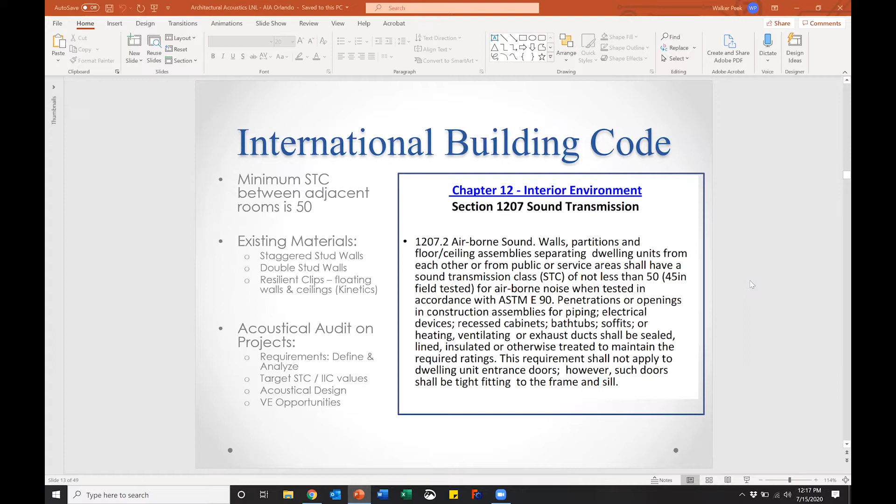Okay, but that's only multifamily. Who else cares? How do you apply that to office buildings or movie theaters? Well, here is our book that we published about 6 months ago, after 6-7 years in the field, working with architects, working with contractors, understanding issues that you guys commonly run into.

What does an STC rating give you? An STC 50, that's not a soundproof wall. That's still better than what we see in the field most of the time, but you can still hear a loud TV. At a 55, loud music's audible. At a 60, loud music is faintly audible. And at 65 plus, that's what we design our movie theaters or world-class studios to. That's what you're looking for there.

And at that point, no longer do we use STC. At that point, we're looking at 100 hertz transmission. What's the low frequency transmission? So how do you guys apply that? Here is kind of a cheat sheet from our handbook as well.

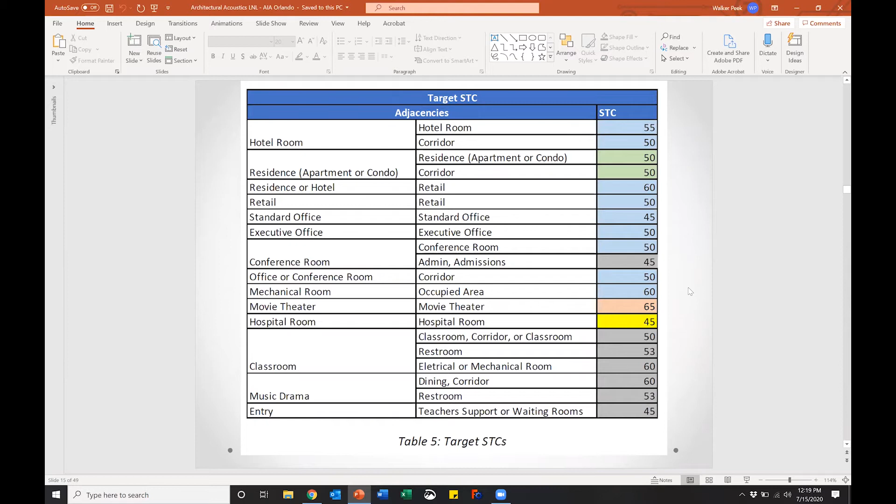So what we've worked to do is give architects, instead of going out and looking at 6 or 7 standards and not knowing what you should be hitting, we've consolidated all of those into a single chart so you can say, hey, based on these adjacencies, here's what I should be performing.

Okay, and here's the question and answer. So everybody, please get ready for the group chat. I want to try to get some participation here. We are going to use the left-hand side here. Once you know what your target STC is, the question for architects becomes, what should my target be and how do I achieve it in a cost-effective way?

So the first thing we're going to look at is our baseline wall. That's our V497 or U465, and very similar to the 419 as well. There's minor fire testing differences based on the drywall, but all of this is type X 5/8" drywall, okay? So what we really care about for STCs is the stud spacing and gauge, as well as the mass. So it's all about decoupling and mass.

This is an STC 44, 3 5/8", 25 gauge, 16 on center, with batt in the cavity and 5/8" type X each side. If we move from a 25 gauge to a 20 gauge, what do we think that this number in the blue is?

48. Thank you, David. Meltem and Christine and Daryl, try to give me a guess on the next one. I want to make sure. Oh, better. Thank you, Beth. Well, that's very interesting, and that's very common. Oops, well, I can't quite get full screen here, so I'll just move this.

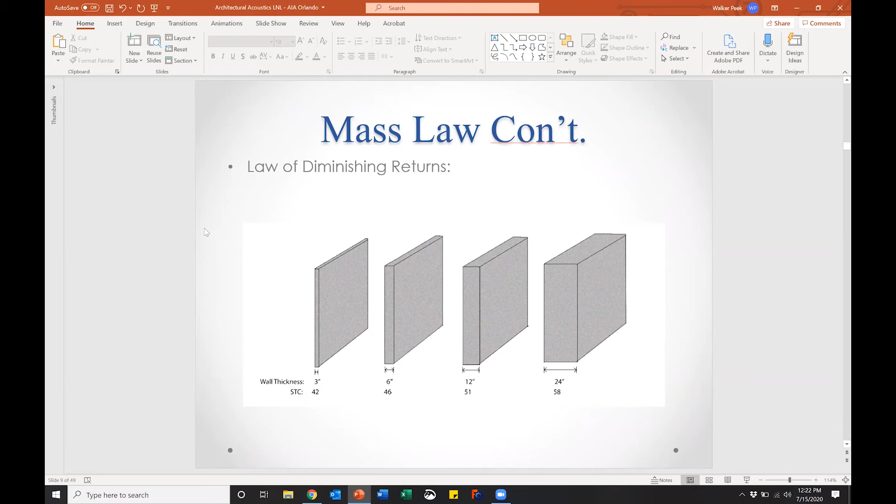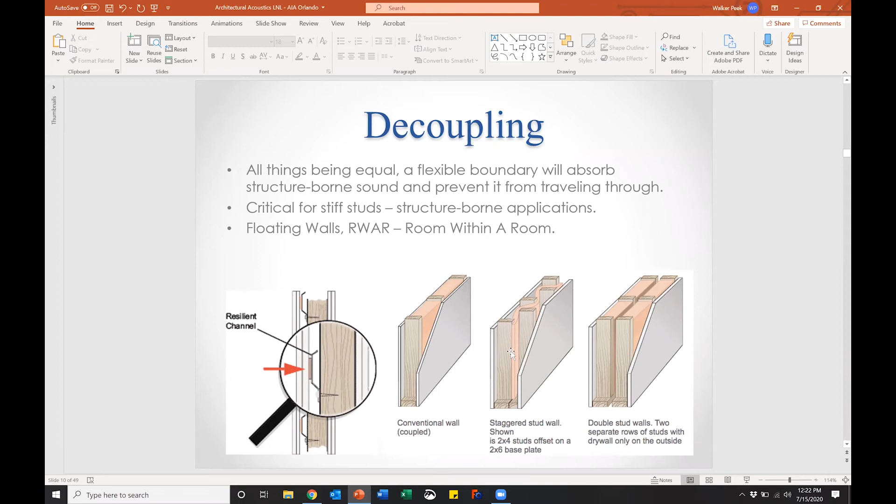But what we're looking at is if you have studs that are closer together or stiffer, well, now you've got this bridge across the cavity, and you're not actually adding more mass to the entire structure. You're only adding more mass right here.

Excuse me, did I skip one? Oh, okay, well, that's the problem.

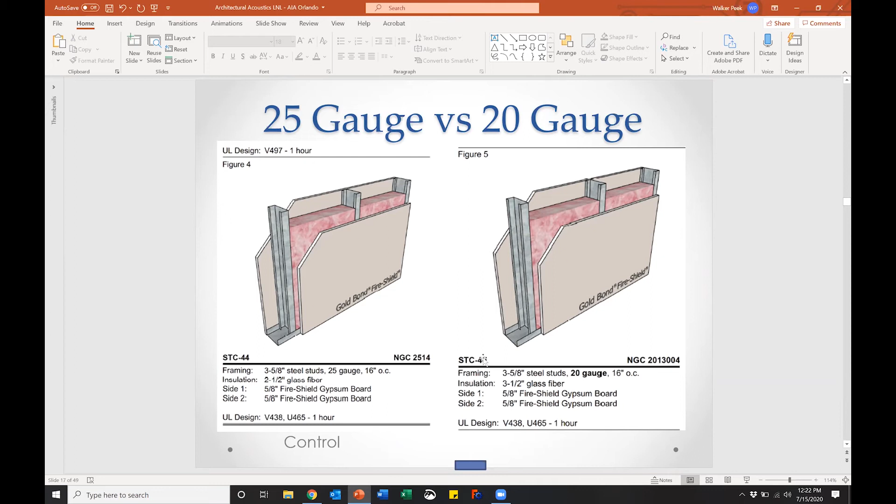I skipped this one. But you are adding more mass just where the studs are, but you're not adding more mass everywhere. So in that case, you're actually losing 4 points when you go from 25 gauge to 20 gauge.

Okay, now let me ask this one. We've got, you already know this assembly, it's the STC 44. Okay, we're gonna leave that as is. This time you're gonna take out batts in the cavity. Okay, so what do we think that the STC is this time? 38, 44. Okay, so somebody said it doesn't change. 2 people said 38, okay? And 1 says lower, thank you. In that case, you lose 4 points.

Something we see a lot is, so 1 person thought it didn't change. 2 people think it moved down 6 points. You only gain about 3 to 4 points for batt. We see it called soundproof batt a lot. It's something I try to get out of the architect's nomenclature. It's not really soundproof batt, it's R rated.

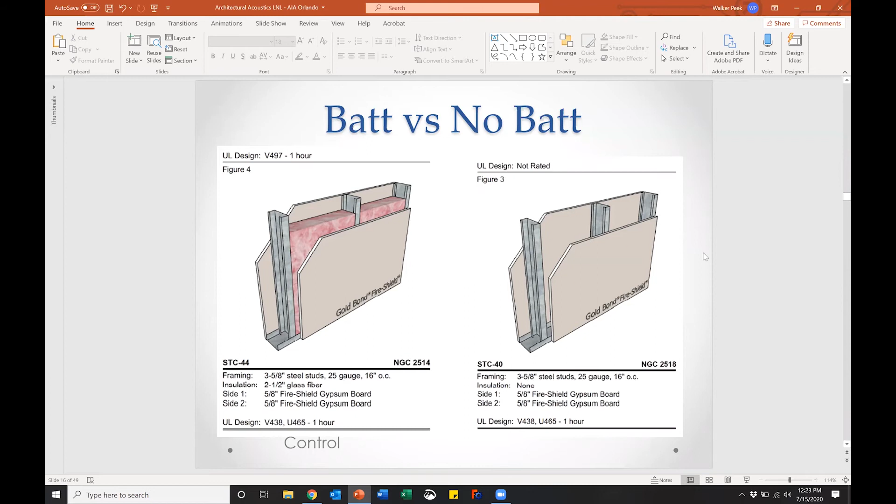That's a thermal rating, but it does help dampen those 2 sheets, and it stops the sound that goes through the drywall into that cavity from resonating in the cavity. So you do get some benefit from batt, but it's not nearly as significant as a lot of people think that it is. Okay, so next one, 44 for our standard, our kind of control variable here.

What do we think it is if you add RC on 25 gauge at 16 on center? 40. Greater, says Beth. And in this case, that's the best way to start with it. Is it better or worse? It's going to be at least better because you're only decoupling. You're not adding or subtracting mass.

So your mass isn't changing at all across the entire system, but you are getting that rigid 5/8 inch Type X slightly off, if installed correctly. But you're getting it off that semi-rigid 25 gauge. 25 gauge does have some bend to it, some give. It's not like 20, which is much more rigid. But you're getting a little bit of performance.

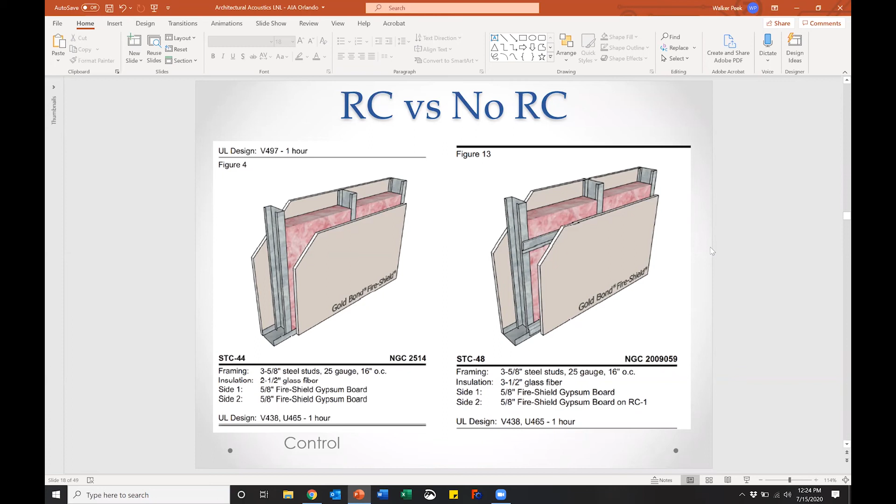This is a very common wall that we see architects and contractors use for apartments. For NGC 2009-59, this is not achieving that minimum STC 50 that you need. It's nowhere close to getting to that 55 or better that a lot of applications require.

Okay, wood studs. NGC didn't test wood, so I had to do this one. And I'll just skip this one because I'll give you the answer. To go from metal 25 gauge at 16 to 2x4 at 16, you drop to a 34. And that's because wood studs, think about how thick that cross section of the timber is.

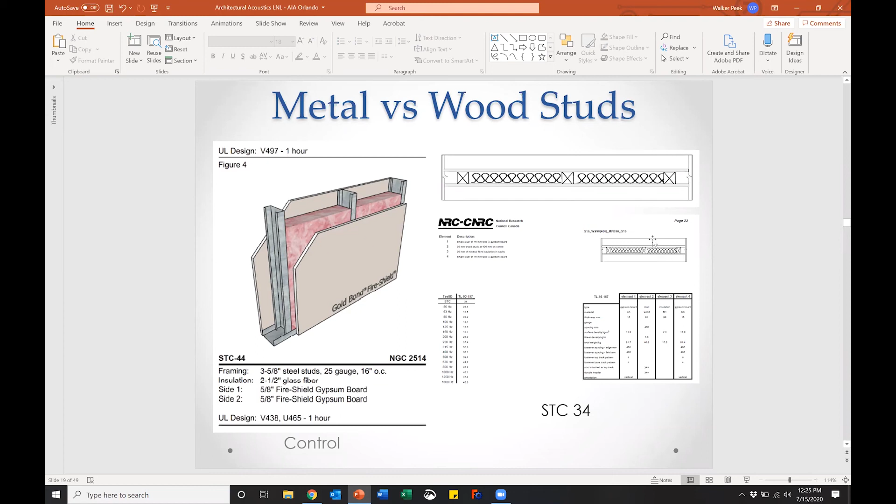Instead of a 20 gauge, which is, you know, several more mils than 25, and it's very rigid, but not nearly as much as wood. You know, a 20 gauge stud you can bend with your hands. A 2x4 you'll never be able to bend from a cross section perspective. So you have all that rigid, wide cross section.

Okay, 2+1. Okay, so I will ask on this one. This is that 34 we just saw. If you add a layer of drywall here on one side, what do we think this goes up to? You are adding mass here. You're getting full coverage on one side of the wall with doubling the drywall.

The same, 36. Daryl and Melton, great guesses, 36. You're barely picking up anything because this assembly is so rigid already. At that point, adding mass doesn't really help on a rigid assembly.

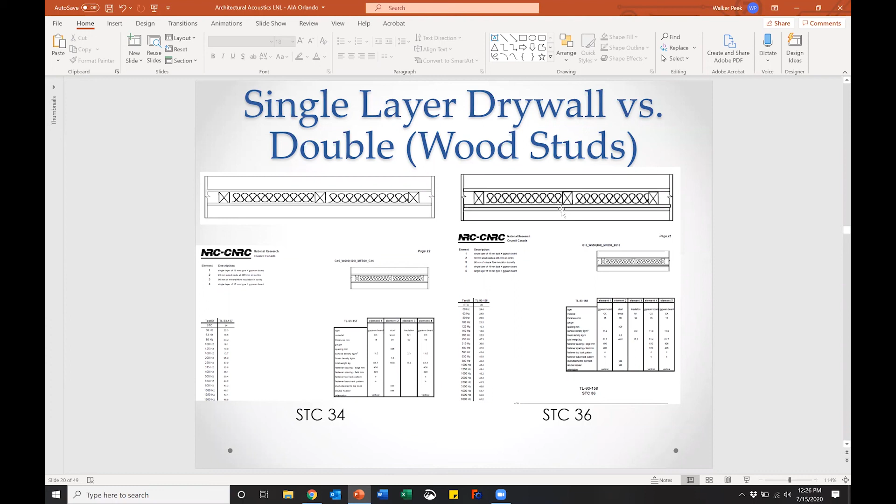So a little caveat or a little anecdote I like to share here is my cousin who was building a house up in Westchase. He gives me a call. Westchase is like North Tampa, and he's got his contractor on the phone with me. He puts me on speaker. He says, "Hey, I got a 2x6 wall, and it's between the master and the kid's bedroom, and we want this wall to be soundproof, but the framing's already done, so the 2x6 are already installed."

And he says, "Hey, I really want to soundproof this wall. Can I add batt in the cavity?" And I was like, well, a 2x6 at 16 on center, that's a very strong wall. And adding batt's going to give you a few points, maybe 2. And for a rigid assembly like this, he's like, hey, can I double drywall each side? If you add another layer of drywall, you're at a 37. If you add another layer of drywall after that, you're still at a 37. These diminishing returns really drop off.

And so my thing is, the contractor thought he had soundproofed this wall with a 2x6 at 16 on center with double layer drywall. And he was sitting at a 37, which means you can basically hear soft chatter between the two sides of the wall. So important to remember that if your stud system's not correct up front, you're not going to get good STC performance on your walls.